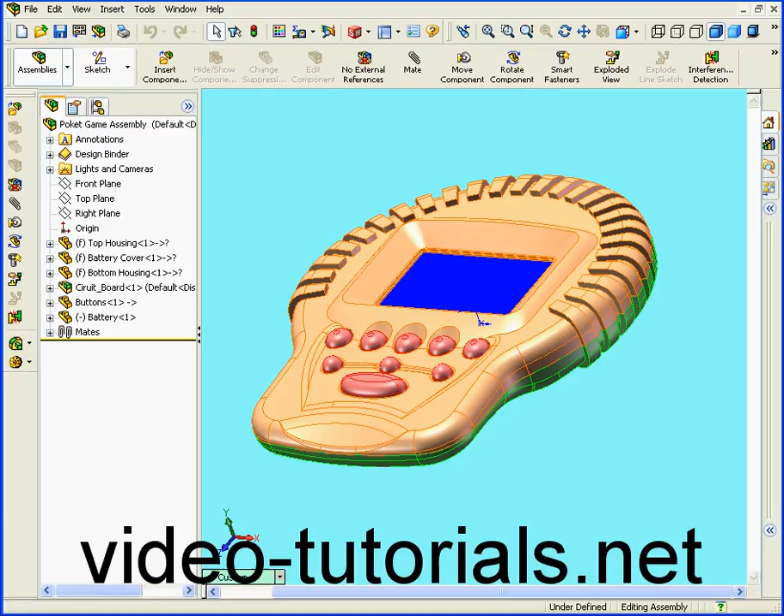Welcome to the final segment of our Pocket Game project. In this tutorial, we'll be finishing the LCD opening.

Let's right-click on the top housing and select Edit Part. Let's expand the specification tree.

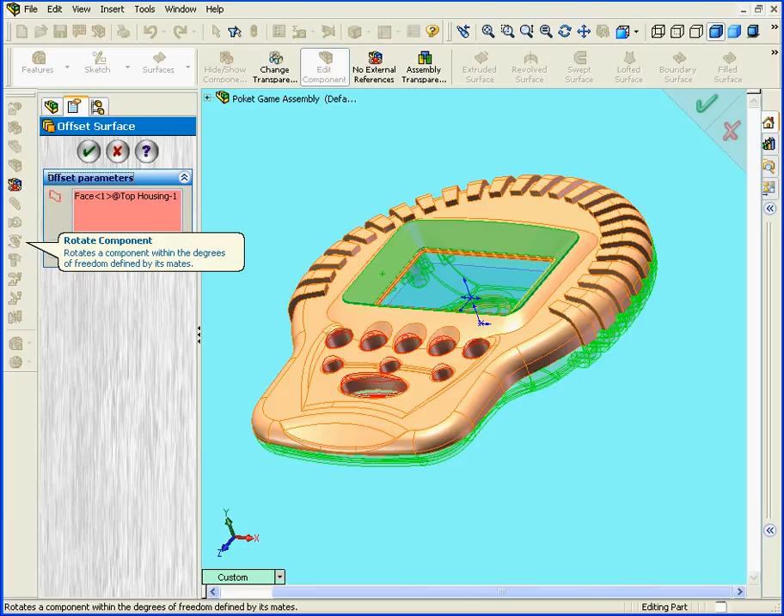Next, I'm going to offset this surface by 0.5 millimeters. Tab. Let's reverse the direction also. Click OK.

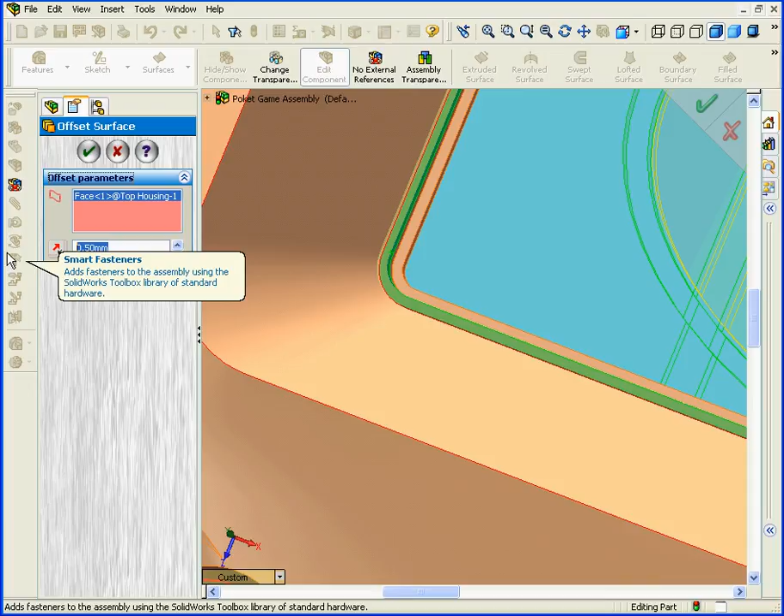Let's offset another surface now. Activate the Offset tool. There's something pre-selected here, let's delete it. Let's select the surface we want. We'll enter a 0 offset distance value. Tab. And click OK.

All right, let's hide our solid body. Expand the solid bodies folder, right-click, and hide.

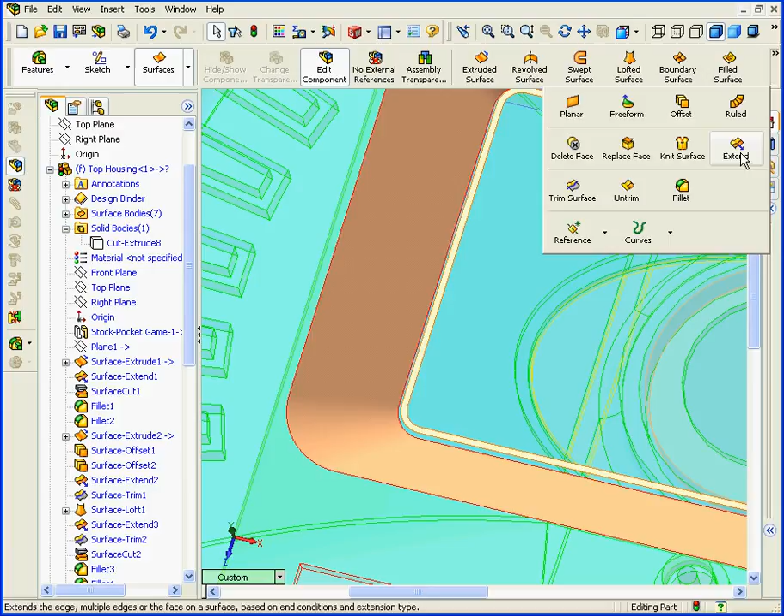Next, we'll need to extend this surface. Activate the Extend tool. Click on this edge. Under End Condition, choose Up to Surface. Now we select the surface to which we'll extend, and click OK. Next, let's activate the Planar tool and create a planar surface right here.

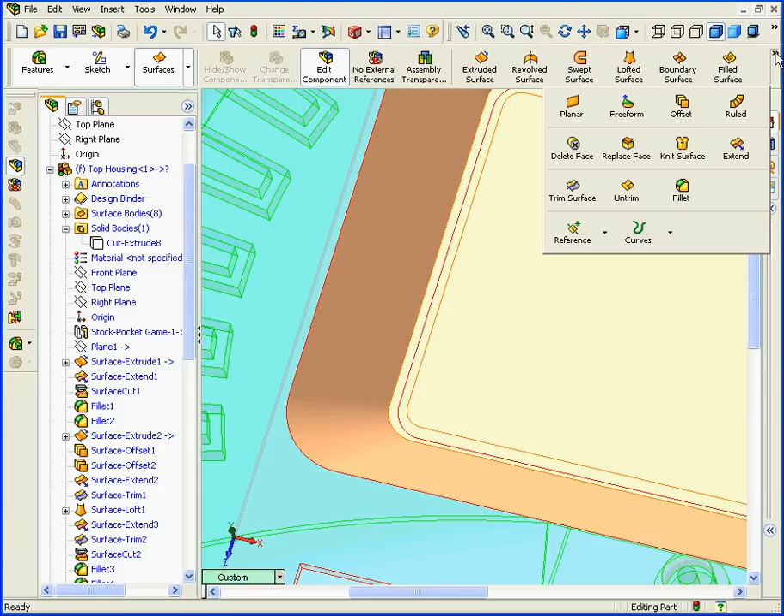Click OK. Now we'll activate the Knit Surface tool, and we'll knit these two surfaces together.

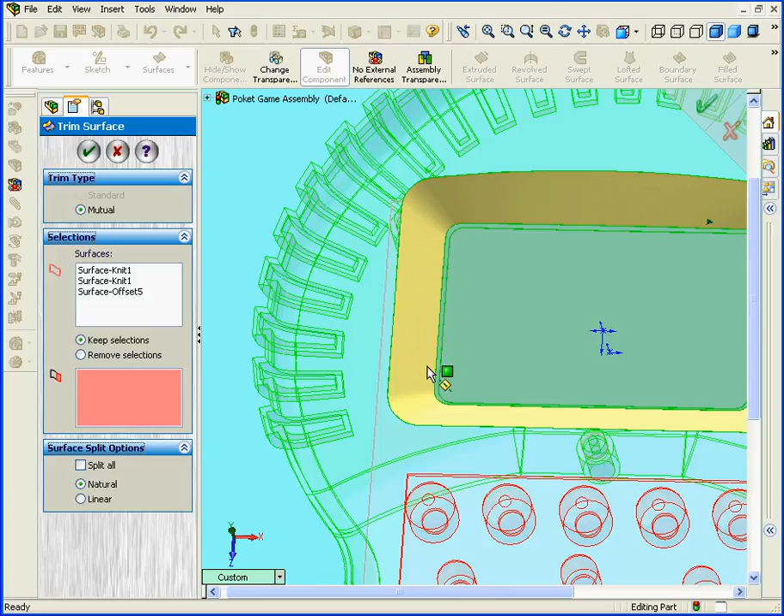Finally, I'm going to activate the Trim Surface tool. Let's select the Mutual Trim type. Let's select these surfaces. In the Keep Selection area, let's keep this surface and click OK.

OK, let's zoom out. Next, let's insert a plane that's parallel to the top plane. Select Top. We're going to offset the plane by 12 millimeters. Let's check to make sure it goes in the right direction, and click OK.

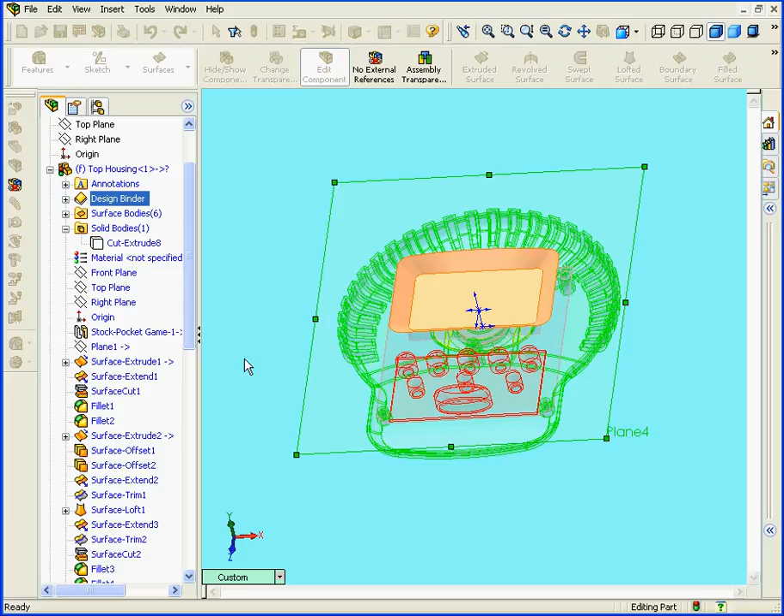Now let's right-click on our new plane and insert a sketch. We'll take a top view.

Next, let's activate the Rectangle tool. Right-click and select.

Activate the Point tool. We'll insert points here, here, here,

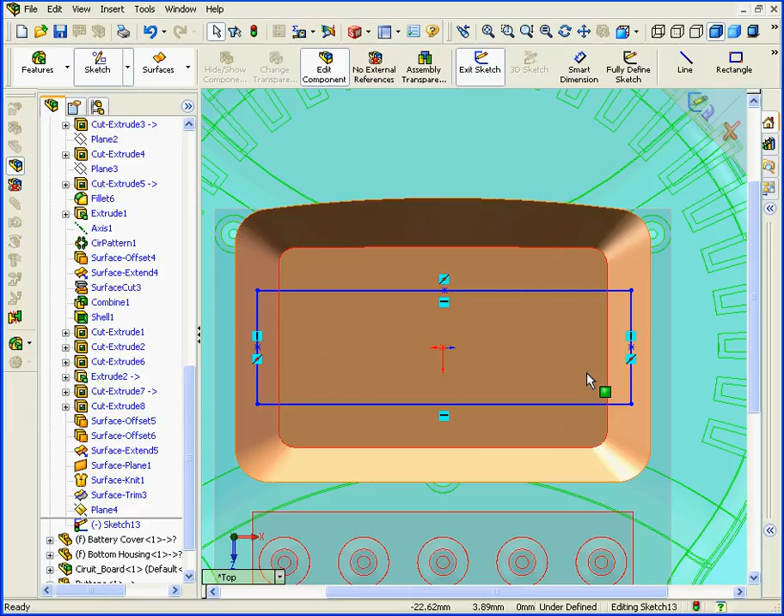and right-click and select. Now Shift-select this point, and add a vertical relationship. Shift-select this point, and add a horizontal relationship.

Oops, I pressed vertical by mistake. We'll need to delete that. And let's add a horizontal relationship. And click OK.

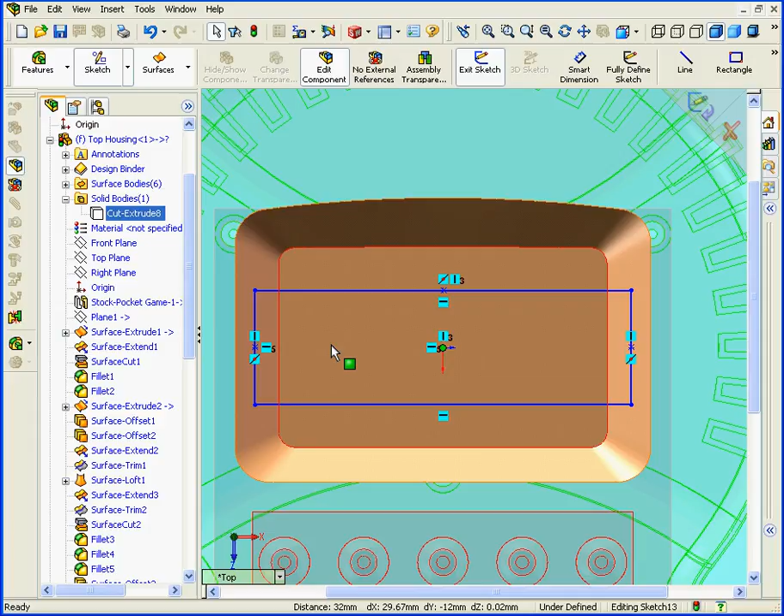Now we'll activate the Line tool to connect these 2 points. Right-click, select.

Let's Smart Dimension. 60 millimeters here. OK. Here, let's enter a value of 16 millimeters. OK. And OK.

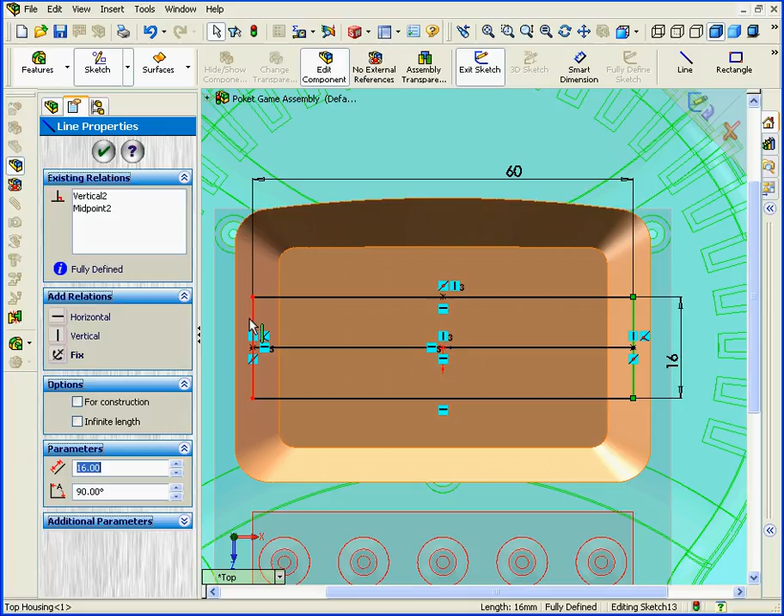Now let's Shift-select these 2 lines and convert them to construction geometry.

Next, I'll Shift-select these 3 lines and activate Offset Entities. Offset distance, let's enter a value of 0.5 millimeters. Tab. Let's keep the Cap Ends checkbox and the Make Base Construction checkboxes checked. Click OK.

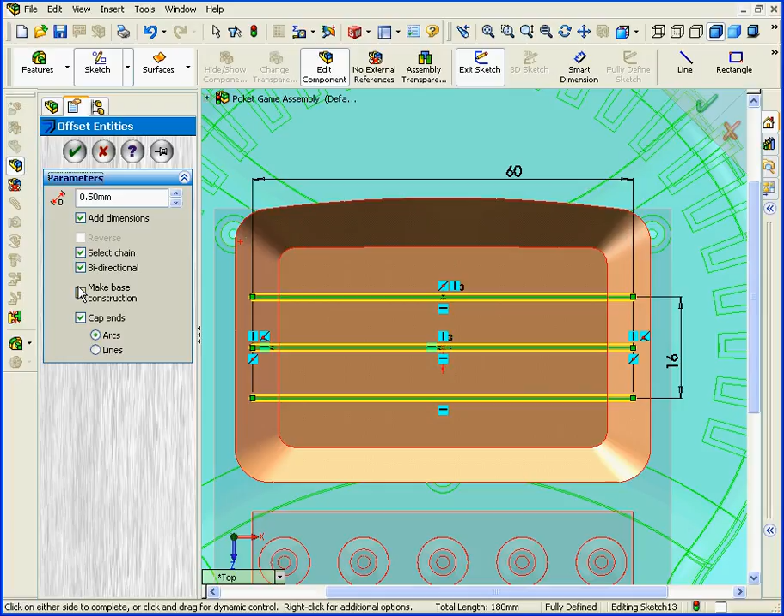Now let's bring back our solid bodies. Right-click and Show.

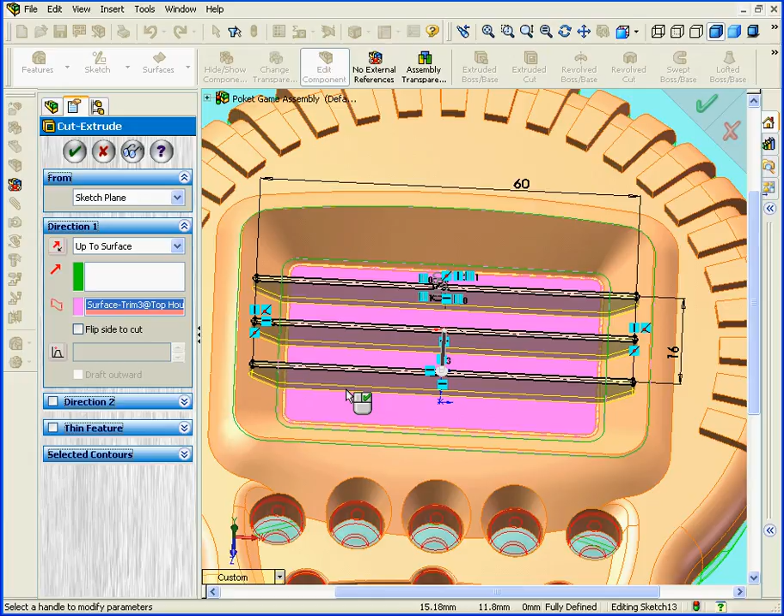Next, we'll make an extruded cut. Let's activate the Extruded Cut tool. From the End Condition drop-down menu, let's choose Up to Surface. And in our surface selection area, we'll select this surface. Click OK.

Let's hide this surface. Right-click and hide. Okay, let's rebuild our assembly.

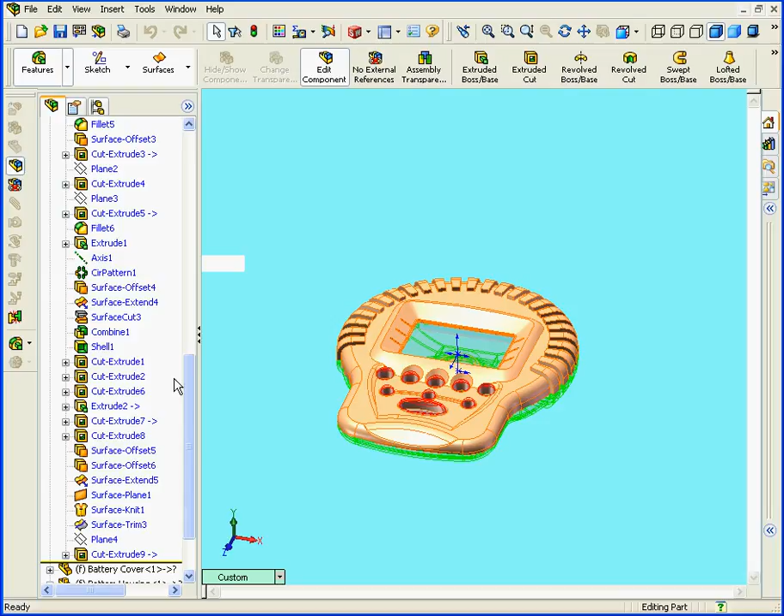And let's hide this plane. Right-click and hide. Let's edit the assembly. Right-click, Edit Assembly.

Okay, it looks good. And this completes our Pocket Game project. We hope you've enjoyed this practical application of SolidWorks to a real-life project.